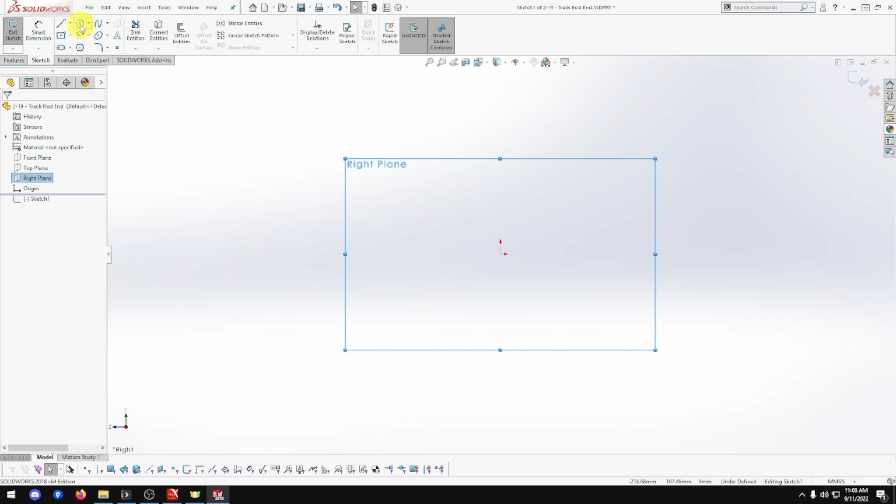This episode, we will be building part 2-19, track rod end for the Clayton Undertype steam wagon. Open up the template. Okay, let's do right view, sketch. We want standard rectangle. That's going to be 9.5 by 2, which should be 19. It is, so 19 square. Always like to double check maths at times, because signs can be off.

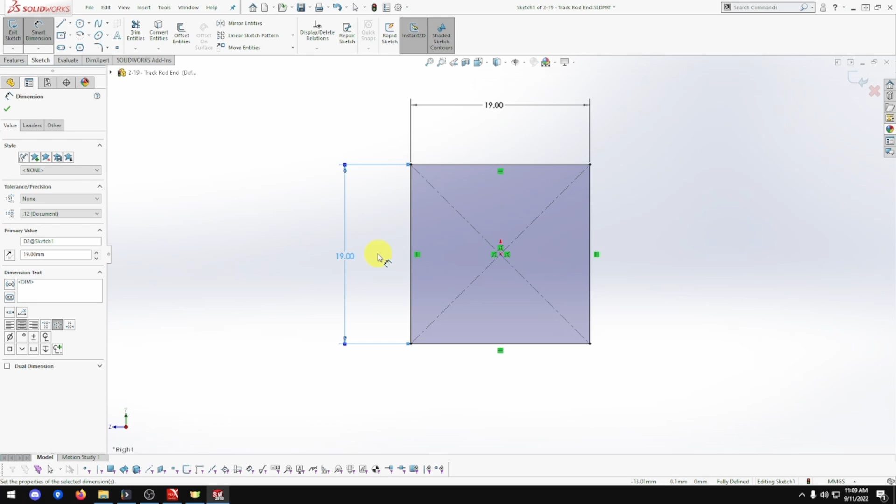Okay, that's cool. Now it's going to be a length of 38. So feature extrude 38. Nope, 38. Not 28, 38, thank you. And mid plane, which I don't think really matters in this piece, but I do it anyway out of habit. And that's going to be rough. That one looks nice. Now the hole's got to go through, but I'm not going to do the hole yet because we do want to add something this side.

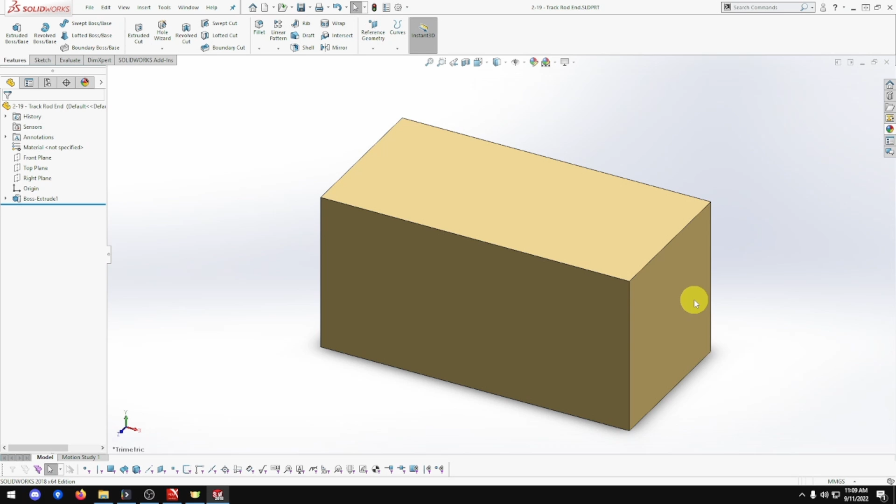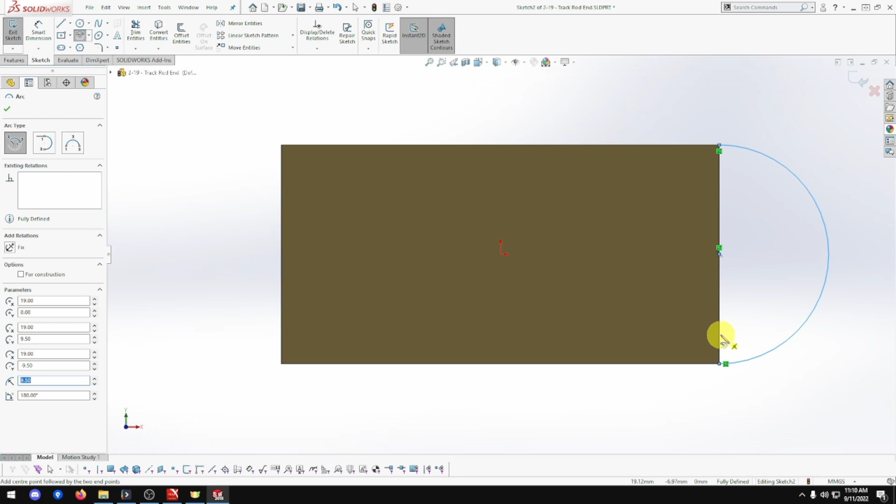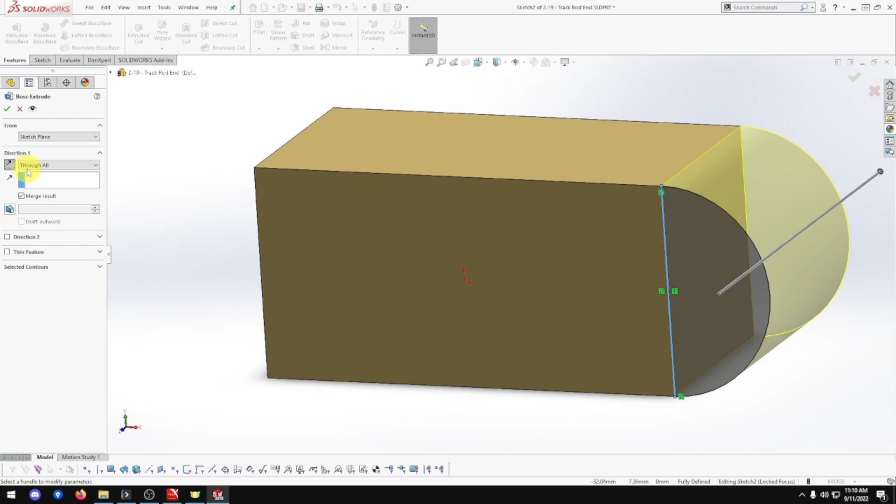Let's go this outside, normal to, and sketch. Now we want to do an arc. There we go. So you do the line, the center point pops up. So we want from there to there and around. Beautiful. Got to put this line in to make it complete, otherwise it won't be complete. There we go. That's going to be through to the other side, so through all. Oh, facing the wrong way. If it's going the wrong way, just hit that button there and done. There's that section done of this piece.

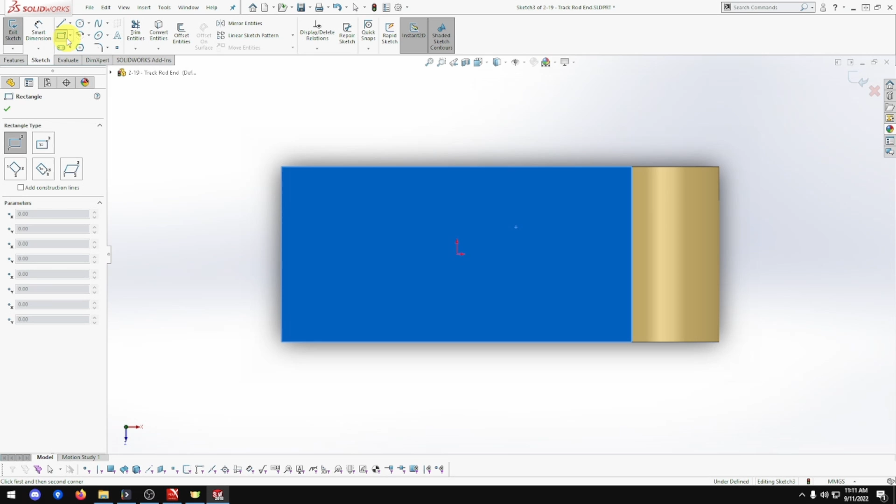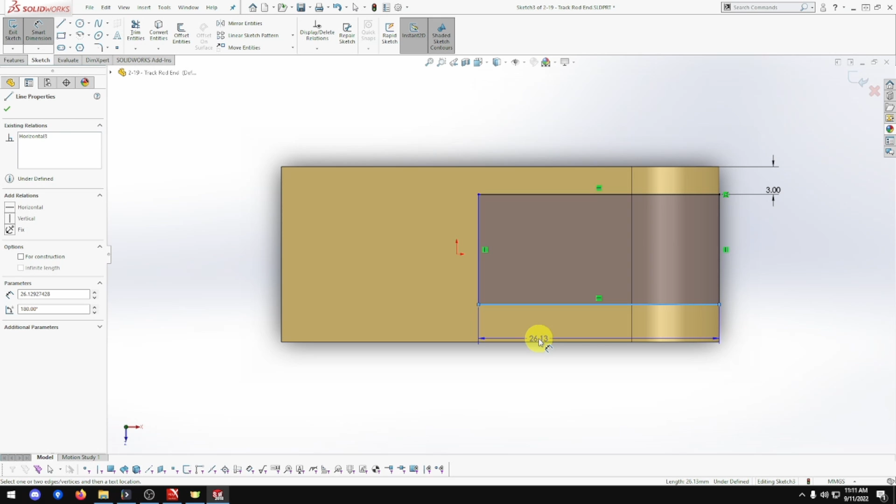Now we might do the top one. This could go either way really, but we want rectangle. Yep. Just connect that piece. This goes through so far. That's going to be 3 mil there. Oh, get rid of that marking. Thank you. Undid that one at the same time. Sometimes it connects a couple of things together, which is kind of annoying, but you live with it. Oh, seriously? Okay. Oh, hold on. Let me do that. There we go. 3 mil. That should be 13.

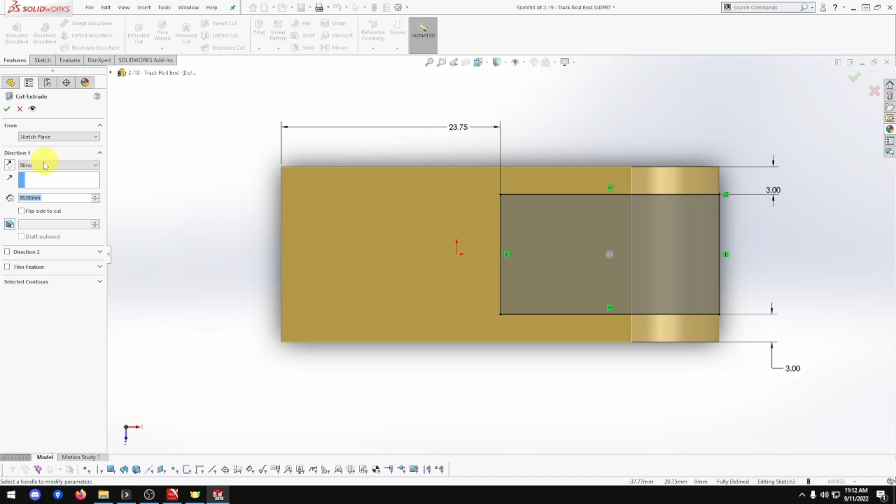It is, beautiful. Okay, from here to here is going to be halfway, which is 47.5 divided by 2. And that's going to be there. Now this is going to be extrude cut through all, done. That's good. But it's got 2 more holes. So go back this side.

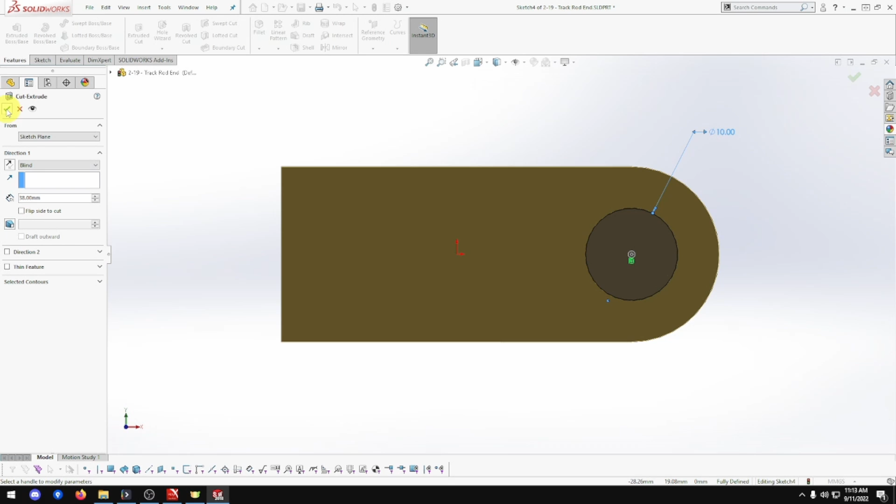Sketch. That's going to be circle. Touch on that one point there, and all of a sudden you've got one there. Shows the point there. Blue kind of makes it a bit hard to see, but just put your cursor over. Don't click, and it shows up that center point. And that's going to be 10. That's going to be cut through all. That one's done. Beautiful. Now we want this end here.

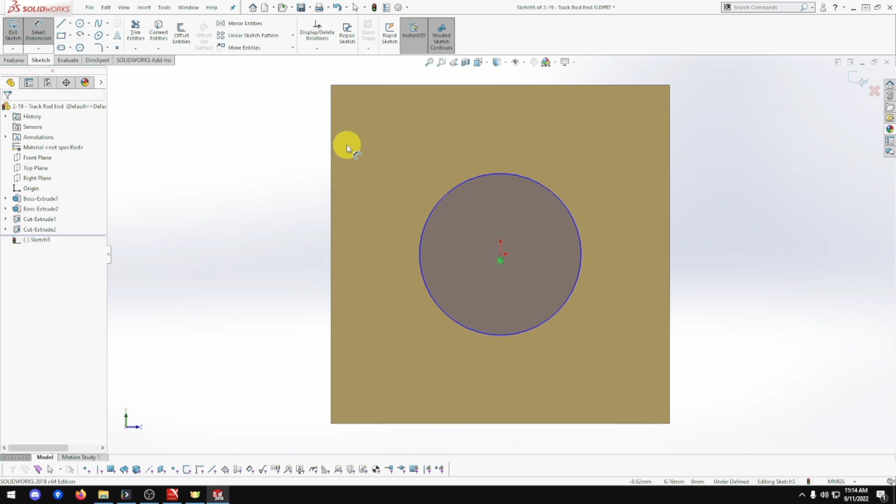Normal to, sketch. Want a circle that's going to be in the middle. It's going to be 12. That's going to be depth of 16. So extrude cut 16, and done. There you go. Now let's do fillets.

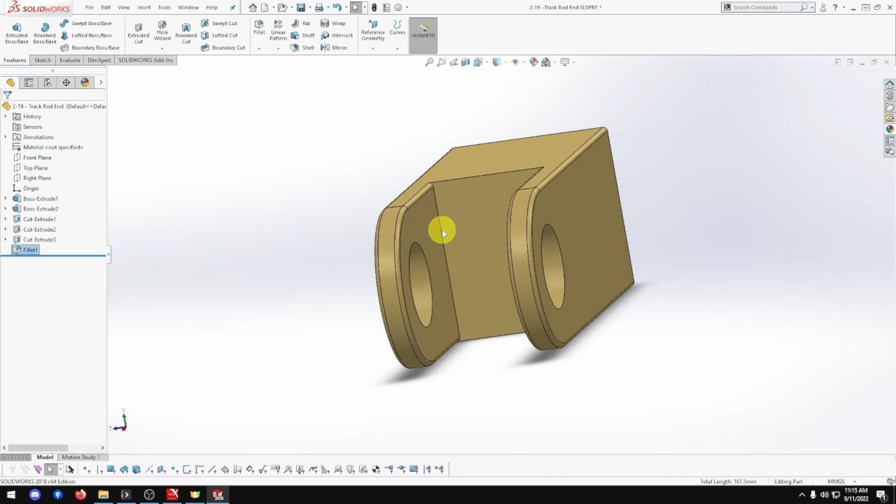0.5. Round that way. Round that way. Oh, missed. That one goes all the way around. Cool. These two. When you click blue, it shows yellow. It means it's going to continue all the way around there, which is cool. There's everything by the looks. Yep. And done. There we go. I'm not going to put one there because I'm not too sure it's going to interfere.

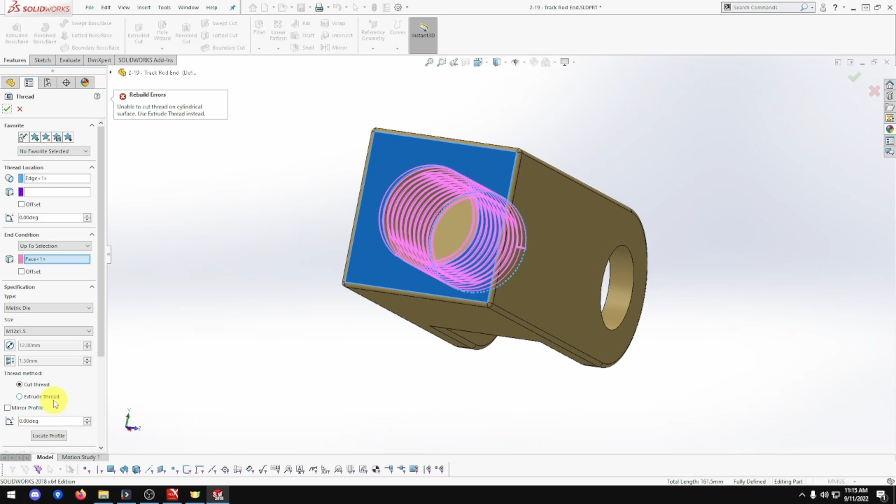But now we've got to put a thread in here. Let's go to thread. It's going to be 12 mil. It's going to be starting all the way down the bottom there. Beautiful. And it's going to be up to selection. And done. Oh, hold on. Extrude thread. Got to change it to extrude thread. And done. There we go. And that is done.

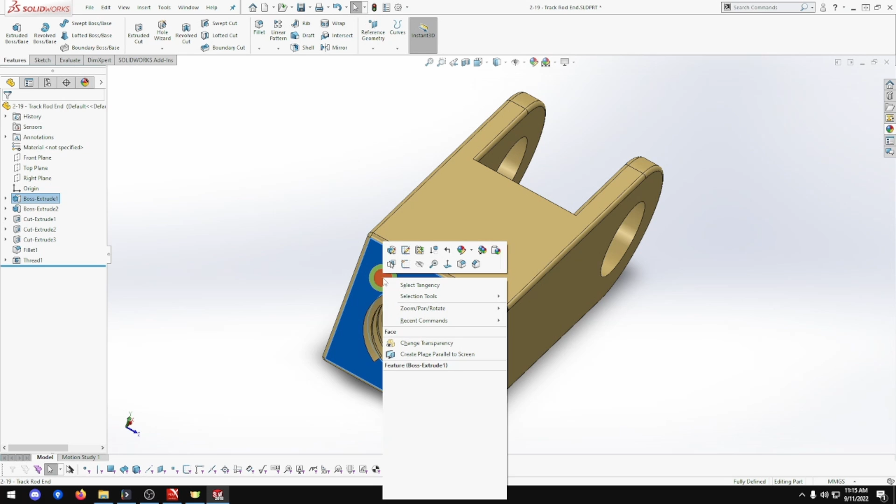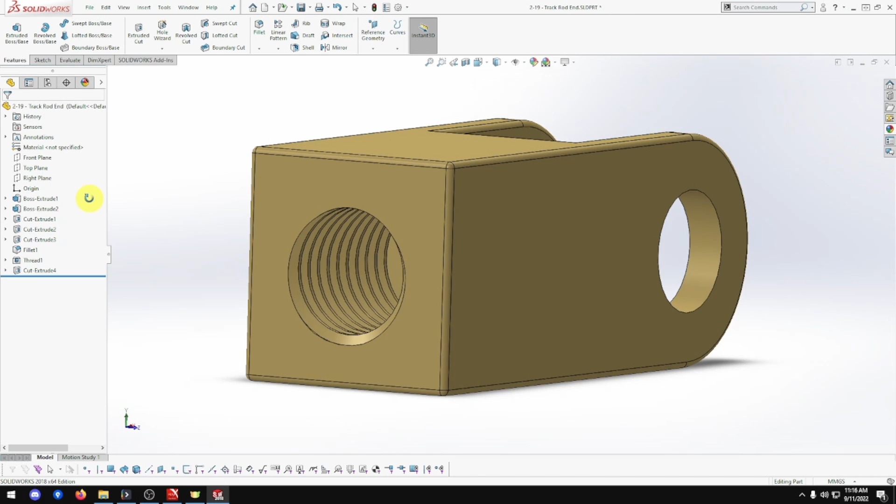Oh man, why does it do that? If anyone knows a way to stop it from coming out like that, let me know. Let me go sketch. I'm still learning, so we just do bigger than the piece. We want to go to extrude. Nope, the other way. Okay. And done. There you go. Thread's now flat. There's got to be an easier way to do that, but I just don't know how yet.

Okay, so that is that piece done. So that's piece 2-19, track rod end done for the Clayton Undertype steam wagon.